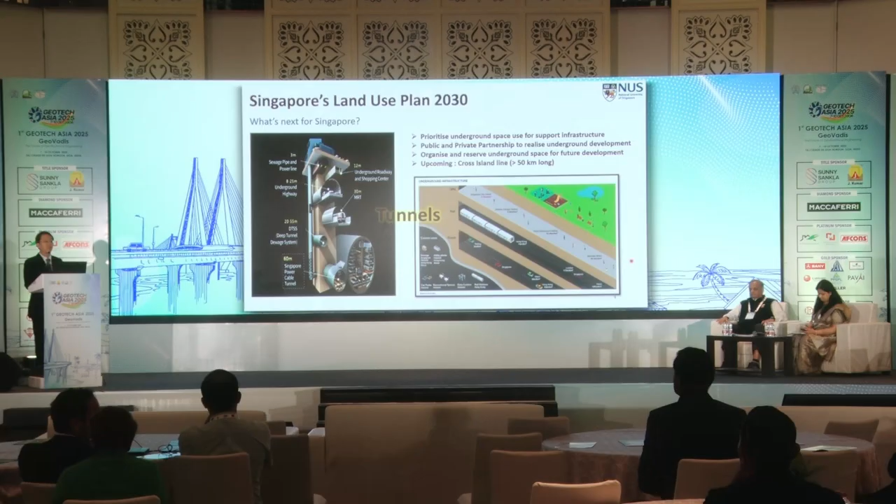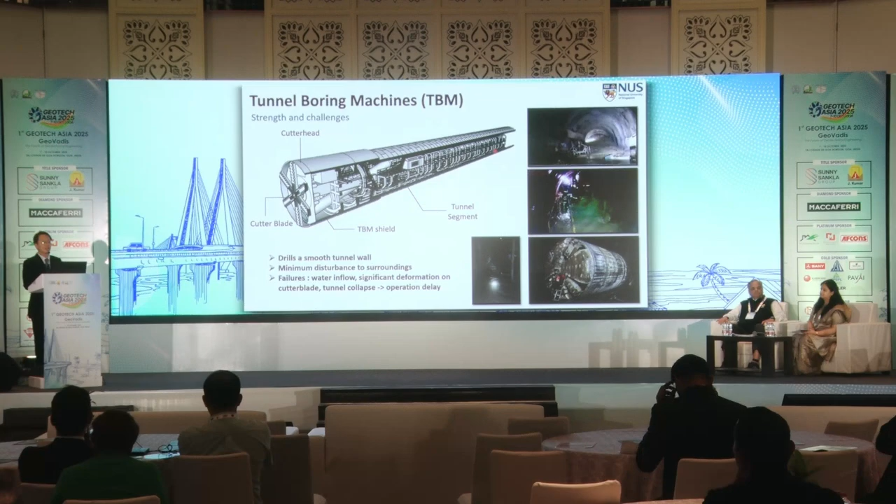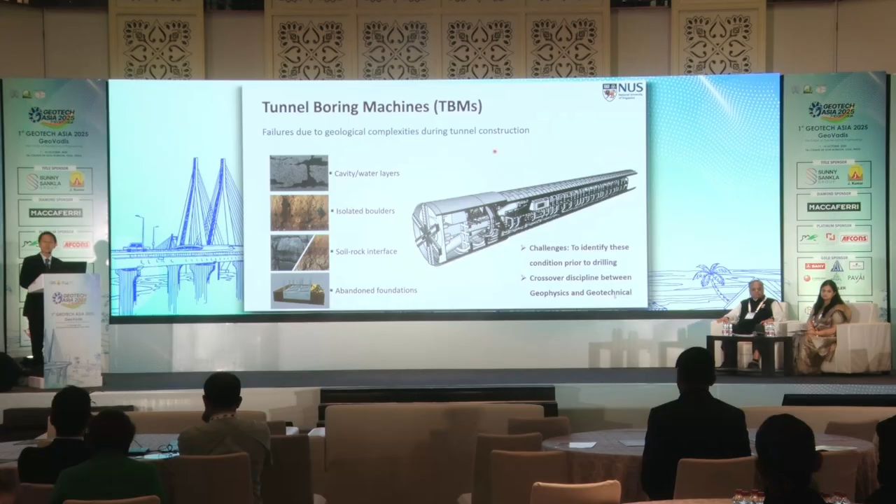Tunneling is often compared to digging in the dark. We usually don't know what lies ahead until the TBM reaches that particular location. And this uncertainty is made worse by the natural variability of the ground conditions. We may face challenges like water ingress, boulders, soil rock interfaces, or even unexpected encounters with old abandoned structures.

The tunnel look-ahead technology that I'll be sharing today is based on seismic reflection methods. It works a bit like bats, navigating in the dark. They send out sound waves which bounce off objects and return as echoes, helping them sense their surrounding.

Similarly, we emit seismic waves from the tunnel face, and these waves reflect off underground features like voids, boulders, or changes in geology. And these are all being picked up by our sensors, our geophones. And this gives us an early warning of the potential hazards before the TBM even reaches them.

So let us just wait for a while. Great. Fingers crossed. Okay, so with that in mind, let's move on to the research methodology.

Earlier, I mentioned how bats use sound waves to navigate. Similarly, in tunneling, we introduce seismic waves using either active or passive methods. Active methods involve generating waves manually, such as striking the tunnel lining with a hammer. Passive waves, on the other hand, are generated and rely on ambient vibrations, like the noise produced by the cutter head during the tunneling, as the wave source itself. Each of these approaches has its own advantages depending on the site conditions and operational constraints.

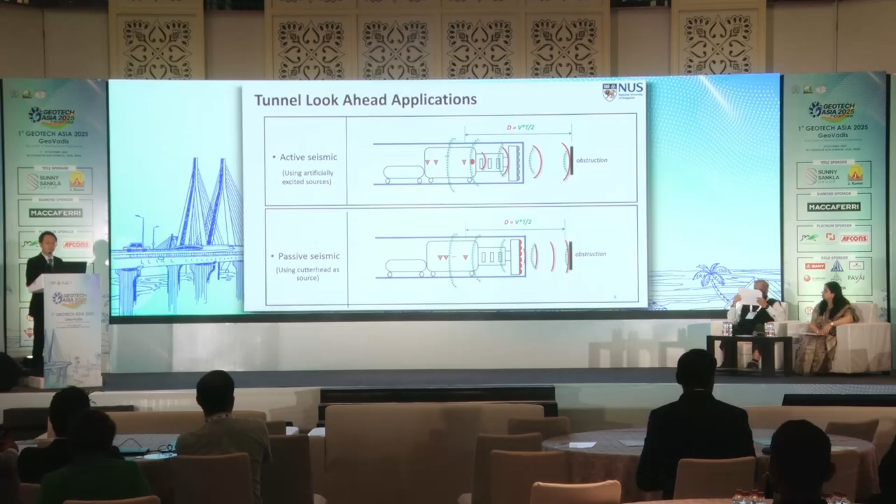This technology, we call it the smart boring system. So anything new, we just put the word smart in front. It combines the data collections inside the tunnel, the numerical simulations, and the wave signal processing to detect the size, the location, and the stiffness of potential obstacles up to about 30-40 meters ahead of the cutter head. And the key benefits include fewer exploratory boreholes needed, early planning and actions on potential obstruction risks, and improved safety for workers and equipment through better foresight and preparedness.

For the data acquisitions, we place geophones in a straight line along the tunnel wall. Just try and use the laser pointer. Can you see the laser?

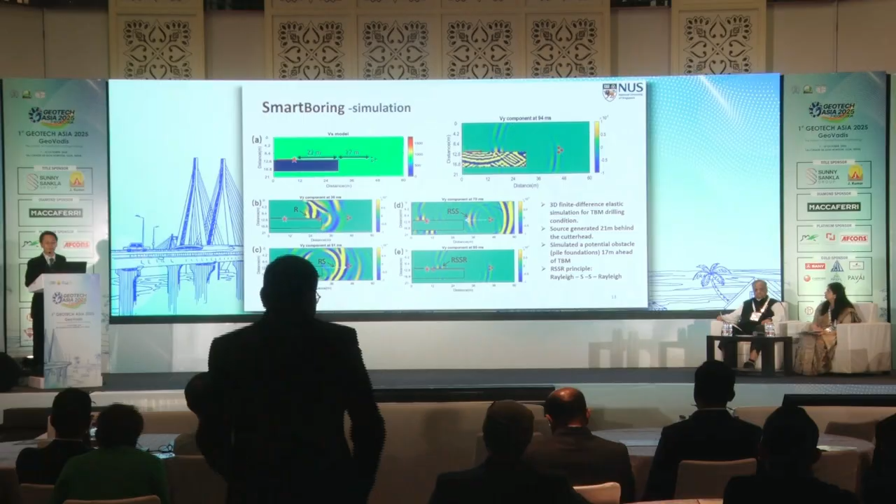Now let me explain how we use semblance calculation to isolate signals coming from ahead of the TBM. Since the geophones are placed and arranged in a line with known spacing, seismic signals in front of the TBM reach them one after another.

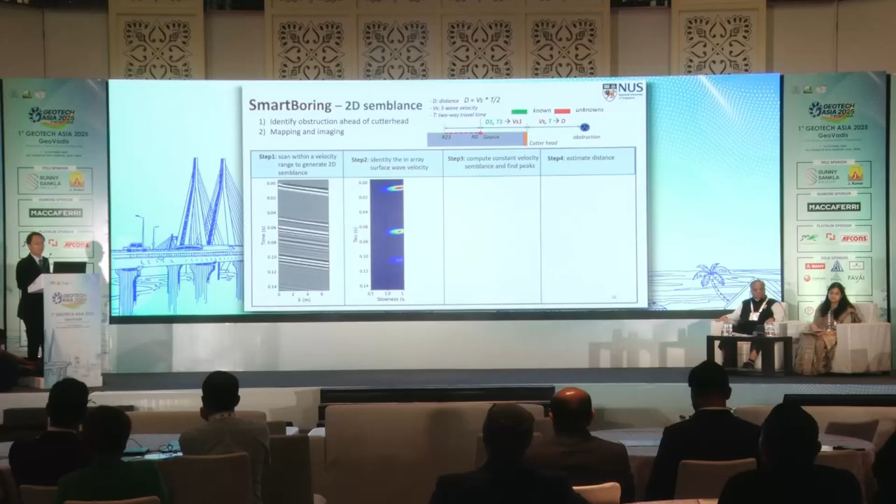The slowness is the inverse of velocity, that's all, nothing new. These different colors indicate the strength of the seismic signal. Once we are able to identify the prominent peaks in this plot, we can determine the velocity of the propagating waves.

Using this velocity along with the measured travel time, we can accurately infer the distance of the obstacle away from the cutter head, how far it is.

The next important aspect I would like to discuss is that the obstruction is not necessarily always right in front of the TBM. It may be positioned at an angle relative to the tunnel axis, which we call the aperture. To understand this effect, we conducted several simulations with obstacles placed at different angles, ranging from negative 20 degrees to positive 20 degrees.

As you can see from the animations of the three dots flying across.

So in the graph on the right hand side, the distance we obtained from our signals, the distance between the cutter head to our geophone, is 20.96 meters, which matches closely with the actual distance of 21 meters, as you can see from the left hand side.

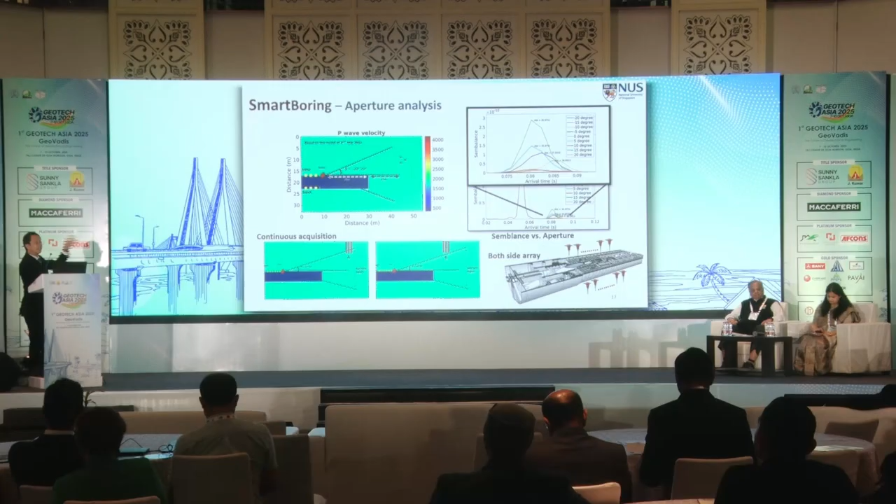For an obstruction located 15 meters ahead of the cutter head, or 36 meters total from the geophone array, we observe that the semblance signal is strongest at 0 degrees, the highest peak at the top right hand side. 0 degrees means the obstruction is right in front of the TBM. This signal decreases in strength and clarity as the aperture angle increases in either direction, meaning the accuracy of distance estimations becomes less certain with a greater aperture angle.

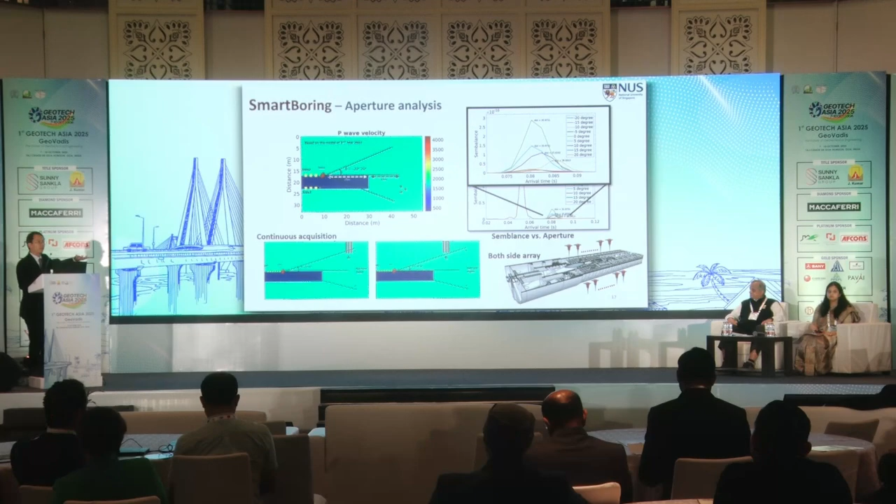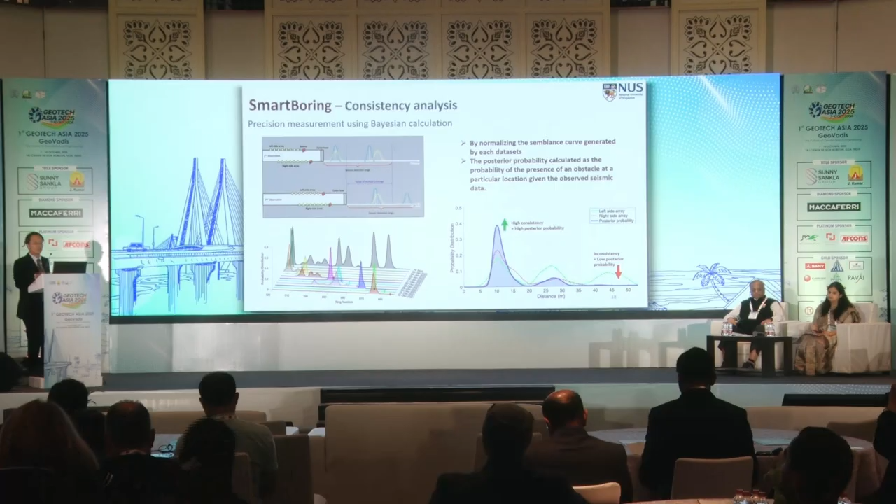So in order to improve accuracy, we recommend continuous data acquisitions as the TBM advances, allowing for confirmation and refinement of obstruction locations over time. Another effective approach is to install dual geophone arrays on both sides of the tunnel, as seen on the top left hand side. This dual array setup offers additional perspective to enhance data quality, and we can apply Bayesian calculations to further refine our estimates. By combining multiple measurements at different times through superpositioning, the resulting probability distribution peak, as seen at the bottom right hand side, indicates a more precise and reliable estimate of the obstacle's position, increasing our confidence in the estimated distance.

So now let us move on to review several case studies that demonstrate the application and effectiveness of these smart boring systems in real tunneling projects in Singapore.

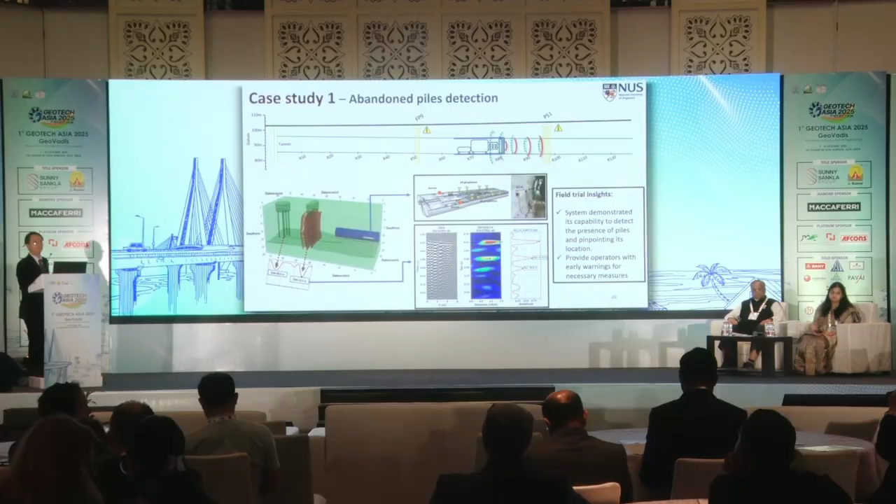In the first case study, we focus on detecting abandoned piles about 40 meters away ahead of the TBM. With continuous monitoring, we tracked the obstacle as it got closer to our tunnel face over time. This helped us identify two groups of disused piles, one previously unknown to both the Land Transport Authority, the client, and the contractor. This shows how the smart boring system can help uncover hidden substructure hazards that previously we would never have been able to perform.

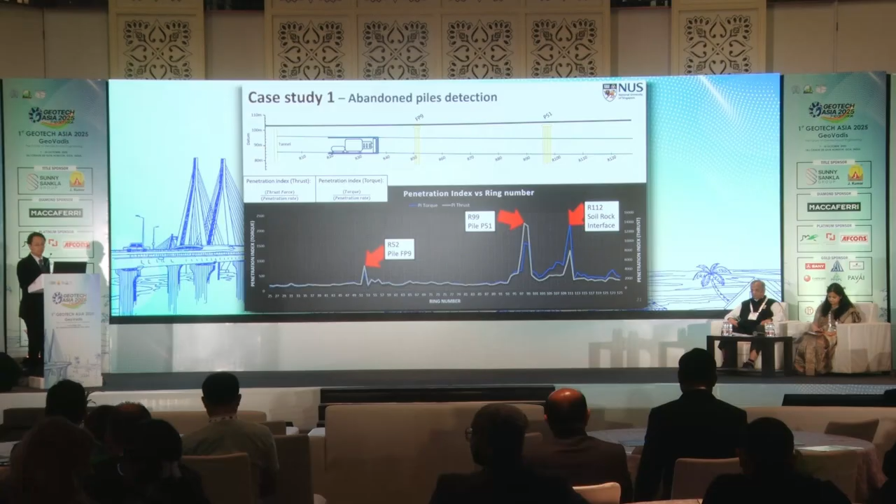Beyond pile applications, the system is also able to identify a soil rock interface at ring number 112, as seen at the bottom right hand side, showing its ability to detect different types of subsurface features. This brings us to our case study number 2.

Traditional site investigation has been helpful and provides ground profiles. However, they only provide that at those specific locations of the boreholes we conduct, but the soil strata and rock depths can vary significantly between our boreholes. In this case, we successfully detected the soil rock interface at around ring number 60, right here, and this was later confirmed by analysis of the muck density derived from excavations and the TBM penetration indices, as you can see from the green arrows here.

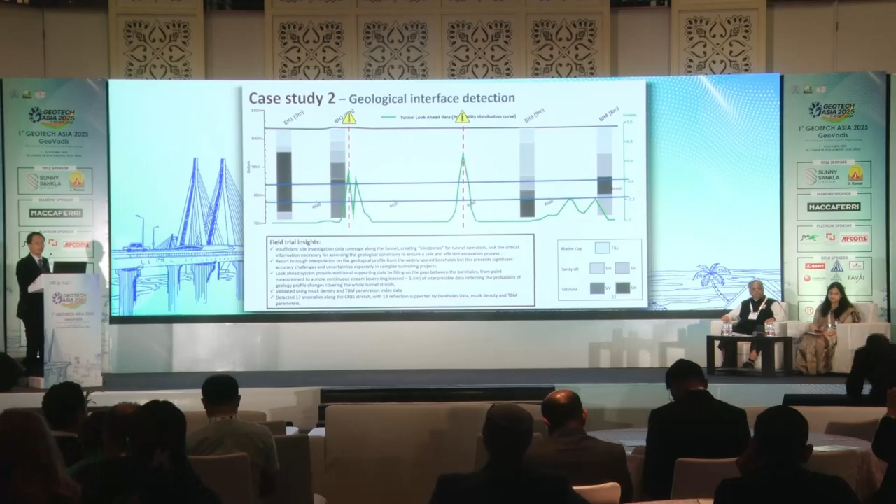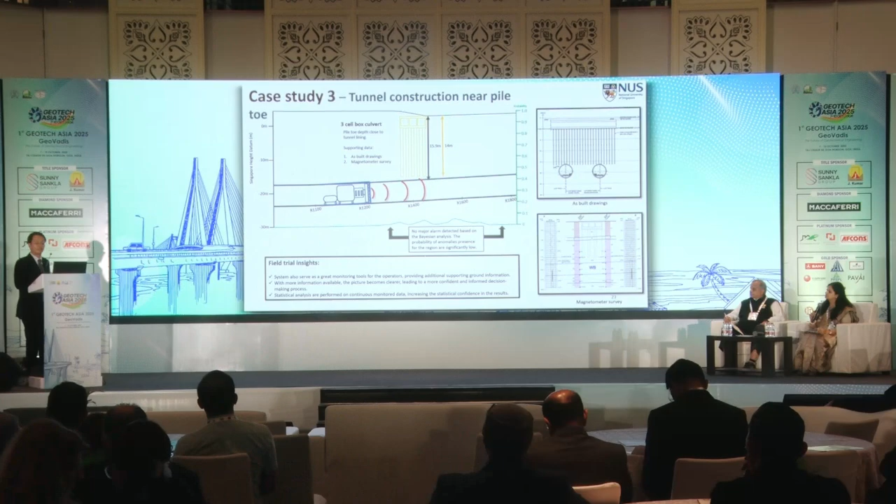Our final case study covers tunneling beneath the pile foundations of a 3-cell box culvert at Changi Airport. Based on as-built drawings and the magnetometer survey, the piles reached a depth of 14 meters, while our tunnel crown was at 15.9 meters, leaving a tight clearance of just about 1.9 meters. Using our smart boring system, we ran a Bayesian analysis that showed a low probability of any obstructions along the TBM path. Thanks to this, the tunneling went ahead confidently and smoothly without any issues.

Okay, so in summary, our smart boring technology provides a non-intrusive and cost-effective geophysical solution for geotechnical applications such as in tunneling.

This technique causes zero interruptions to our TBM operations. The TBM operations can continue to run as per usual. There is no cutter head access required, no drilling, no probing. It is able to offer near real-time reporting.

It has a long detection range of 40 meters, high detection resolution of 2 meters. We get precision measurements on our detections, and it is, most importantly, TBM independent.

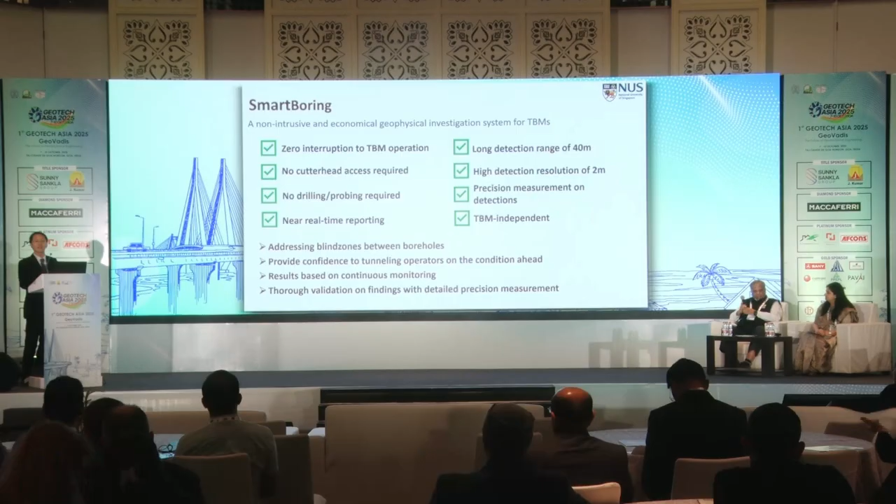Ultimately, the smart boring helps to reduce project delays, minimize equipment damage, and lower overall costs, thereby making tunneling safer and more efficient in a highly urbanized environment.

So I would like to express our sincere gratitude to our partners from NUS, from the government agencies, and the contractors. Thank you so much for your attention. I'm happy to take any questions that you may have.

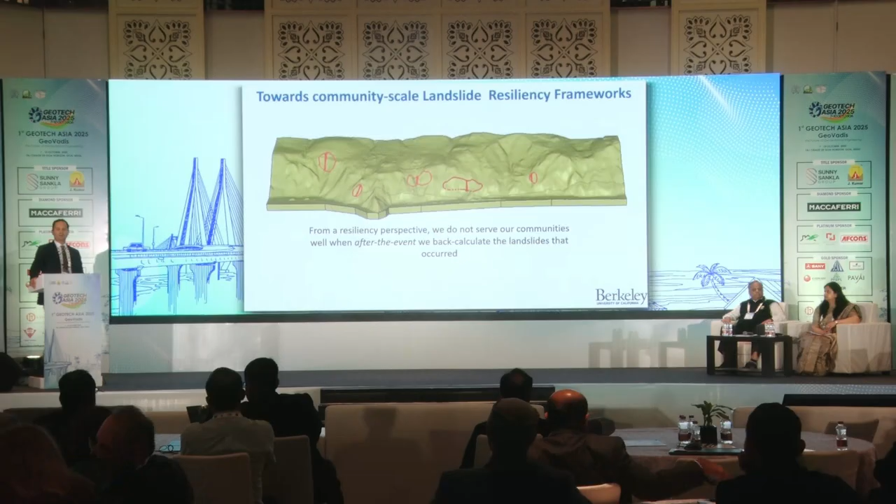When we're talking about the resiliency of our communities broadly, but also specifically for landslides, I don't think we serve our communities well when we only go back after the fact to the location where the landslide happened, drill our boreholes, do our cross-sections, run our models, and explain why the factor of safety was one or the other.

What we really want to achieve from a resiliency perspective is to be able to predict landsliding before it happens, over large areas. That has to be our goal. When I'm talking about predicting landsliding over large areas, ideally we'll be able to predict the exact location, the probability of occurrence since there will be uncertainty, the size of the landslide, and of course the consequences. Because whether it's a big or small landslide, where it is exactly matters. That's our goal.

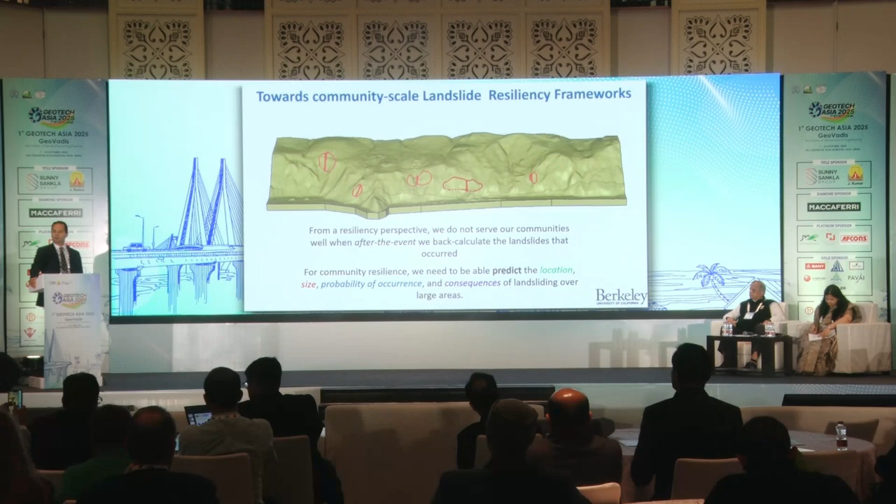Some people may think that goal is unrealistic. I believe strongly that with the advances we have in technologies and modeling, we will be able to achieve this, not in the too distant future. This is a framework you may have seen, a classic framework we use for what we call the landslide life cycle. It starts with mapping, being able to map the landslides and monitor the geologic environment, then trying to take lessons out of these landslides by doing some calculation.

Then of course, understanding that once a landslide triggers, it may move a lot, so we talk about run-out analysis. If we understand all of this with the system, we should be able to do predictive modeling throughout our regional system and identify the weakest spots and fix those first, fix the ones that have the worst consequences. And then we go back with monitoring, really do it.

So I'll try to show some applications of this type of life cycle that we have here for one study area. Now we have applied this to a number of areas - Nepal, New Zealand, California, as well as Greece. I'll focus on Greece because I'm from there, and I have a number of examples staying on one side.

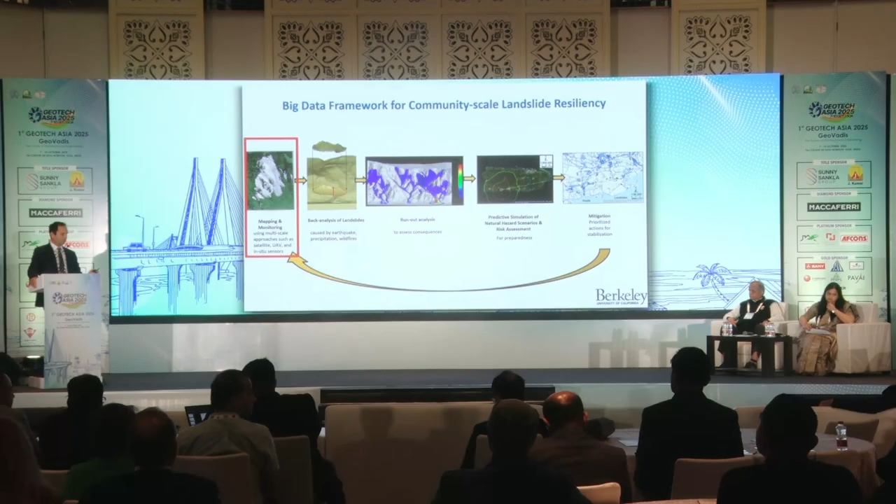So I'll start with mapping a little bit. To describe what happened here, I'm going to be using Lefkada Island in Greece. It's located on the western side of Greece, maybe you can see it with the bullet. And it's one of the most seismically active regions in Europe. There is a devastating earthquake every about 18 years, going back to the 15th century.

That area is really primarily covered by limestone formations, and it's a very actively sheared subduction zone. There's actually a transform fault in that area. The limestone is very heavily sheared, so what you have is steep slopes, sometimes as vertical as 90 degrees. But when you look at the rock itself, you can see it's very sheared, brecciated sometimes, but it stands there.

But of course, when the earthquake happens, there's going to be damage. In 2015, there was a magnitude 6.5 earthquake, and this is footage from a video collected by fishermen during the earthquake. What you see is basically what looks like a battlefield - the entire coastline, which is relatively steep and high slopes, has come down. This is November, so there are no consequences really, there were not that many people at that time.

But this is also a very popular area. These beaches down at the bottom of these slopes are very popular in the summer, and this would have been tremendously consequential if this had happened in the summer. So there was significant landslide along the west coastline, and I'll focus on that in the next presentation.

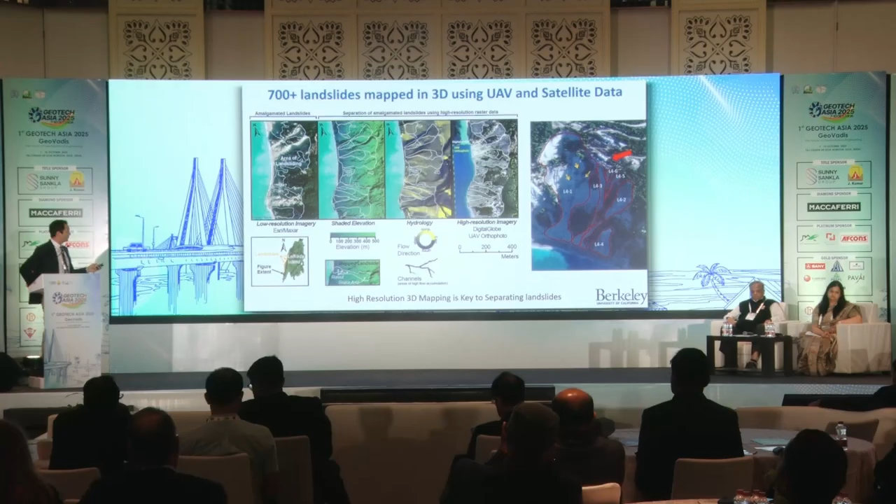Now, if I have a 3D model after the earthquake and a 3D model before the earthquake, and we were lucky to have that because of the work of the Greek government, you can take a difference between the two 3D models over the entire coastline and create 3D geometries of all the landslides that happened along the coast. What you see here on top is satellite imagery using the SETSM approach, and the bottom is the UAV imagery. What you see is colors: the blue colors represent a loss of elevation, meaning that if I take the difference of the digital elevation model after and before the earthquake, I have a lost elevation, things move downward and slip.

What you see with red colors is where material accumulates, where the debris goes. For every single landslide you see here, we can see how much material failed and where it went. We do this so we can separate, for each landslide, what we call the source of the landslide and the runout of the landslide. This is super important from a consequences perspective, we can look at how much sediment is generated, what type of material is generated, where it's going, how it's washing out, how it's eroded.

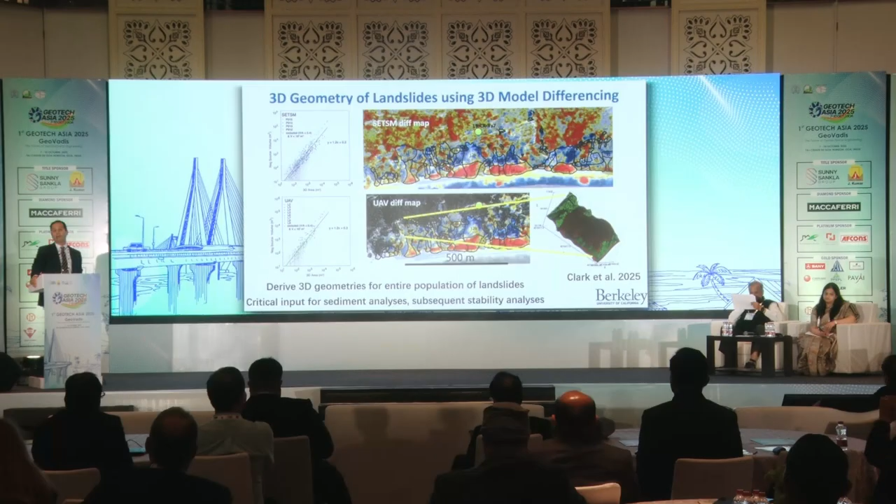What I want to emphasize, in case this 2D image doesn't communicate it, is that for every single one of these landslides we have a full 3D geometry of the source material and how it translated downward in this type of environment. We can use that to back-analyze, in full 3D, every single one of these landslides.

So I would like to do that now. The goal here is not to analyze just some of them, but all of them, and try to see the trends. There's a number of ways we've done it in geotechnical engineering: 1D, 2D, which is what's commonly done in geotechnical practice, and of course full 3D.

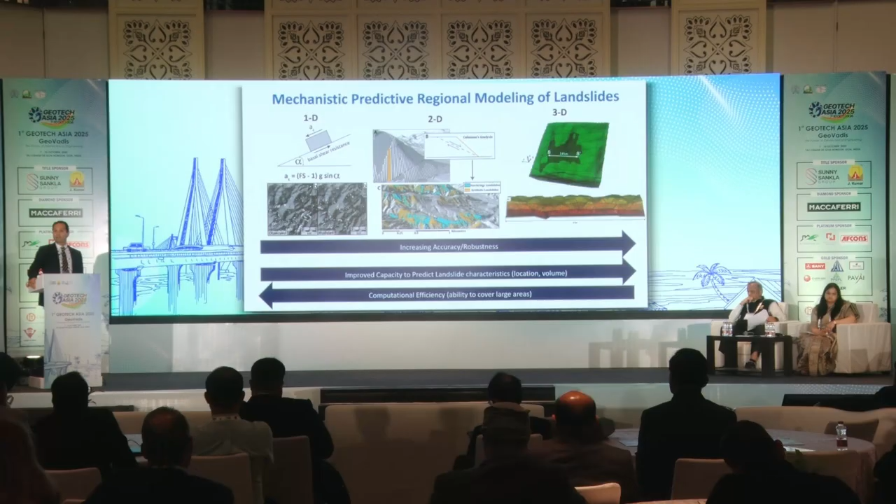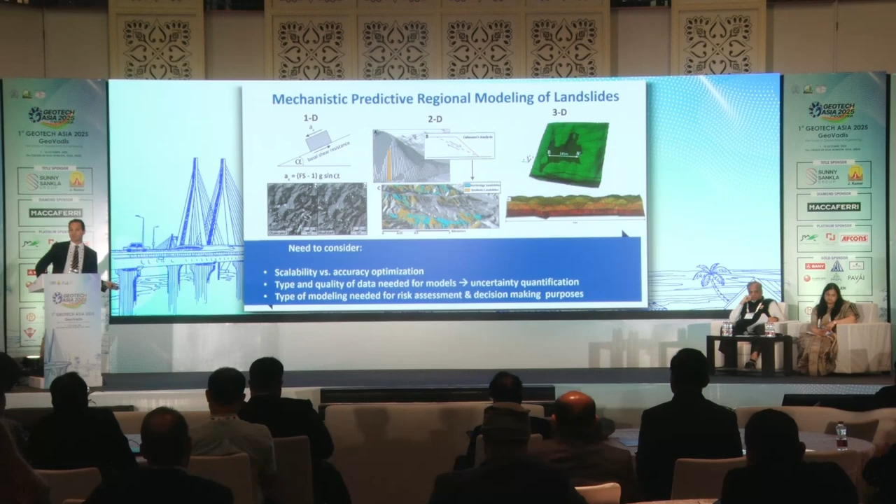There are advantages to each of them. As you move toward 3D analysis, you get better mechanism, better math, more robust understanding of how things move, but the computational cost is higher. So there's an advantage to doing it in 3D, but many times even a 1D or 2D model may be adequate. We've been working on scalability of computation versus accuracy, and the quality of data you have, you don't want to apply a 3D model to low resolution data. The data you collect has to be consistent with your model.

For the purpose of this presentation, I'd like to show you a pseudo-3D approach that we developed. We developed a script for these calculations, we call it RISTAB, and we've made it available to the public so anybody can use it for free. Basically, the RISTAB approach is really a 1D model, very simple, for seismic triggering purposes.

But once you trigger, we use geomorphic characteristics to form an entire scoop of a landslide from that trigger cell throughout the whole uphill area, basically creating a 3D landslide. We've checked that model against full 3D analysis, and I won't bother you with details, but we have papers describing that comparison. The reason this is useful, at least in my view, is because it's scalable.

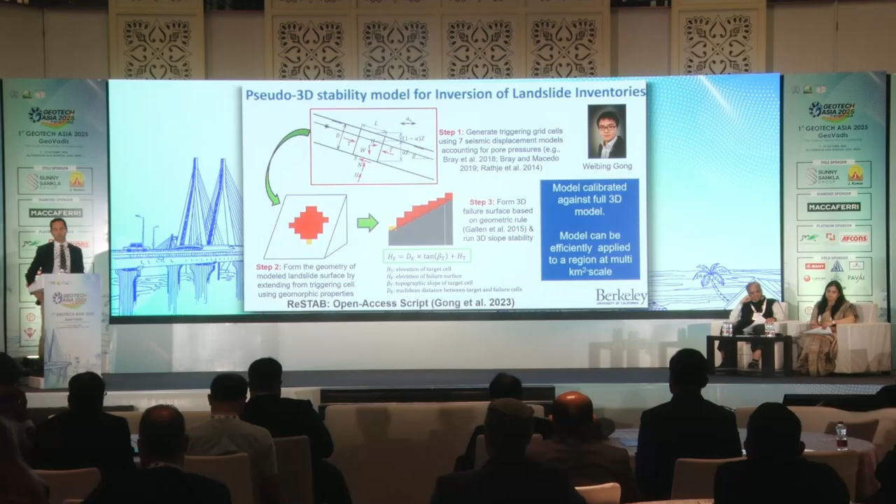I can apply this, and we have applied it over tens of square kilometers, so I can actually make decision making. A full 3D analysis over 10 square kilometers would definitely need supercomputers to do that right now.

So what we do with this technique is take every single one of the mapped landslides that I showed you before, and try to see what type of triggering depth and strength of material will match the location, the volume, and the area of each of these landslides. Out of each of these models, we get a best match geometry, as well as an average normal stress and shear stress for the entire landslide.

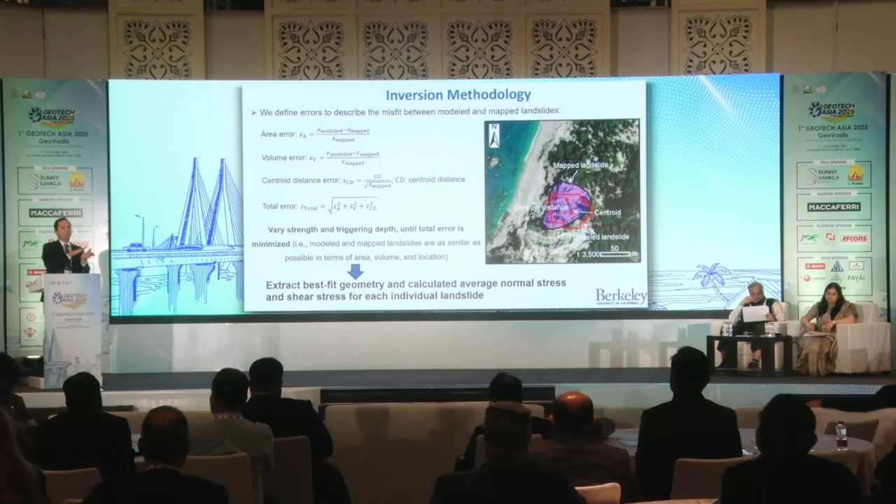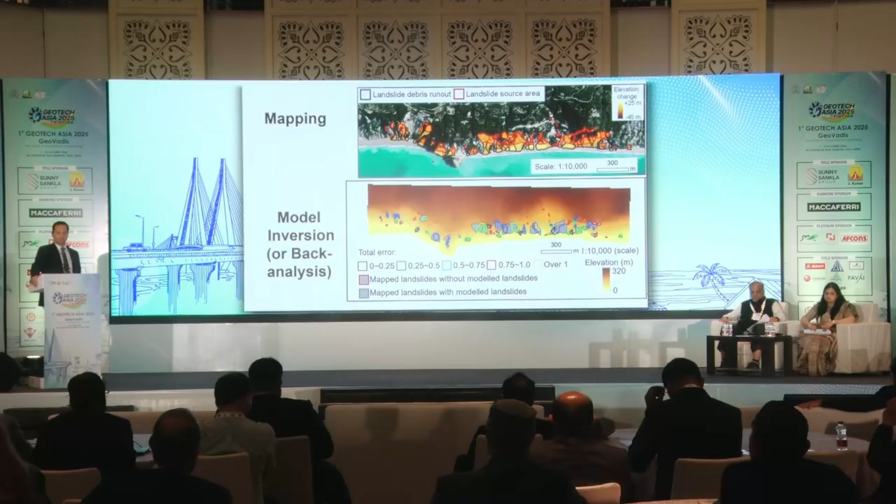So then we match our model. It's not going to do a great job, but we can see how great a job it does. For each of those landslides, we match the model results and try to do as good a match as we can, and we measure the error, how well we did.

Just the major conclusions here in the interest of time: we can see that there are more landslides and weaker strengths in different formations. That we know because geology matters. So you see different strength, lower strength in the Ionian limestone versus the Paxos limestone, which is local.

That we know. What is more interesting in my mind is that within the same geological unit, we'll see also differences in strength. We find zones within the same geologic unit that are lower strength and have more landslides. And that's great to know.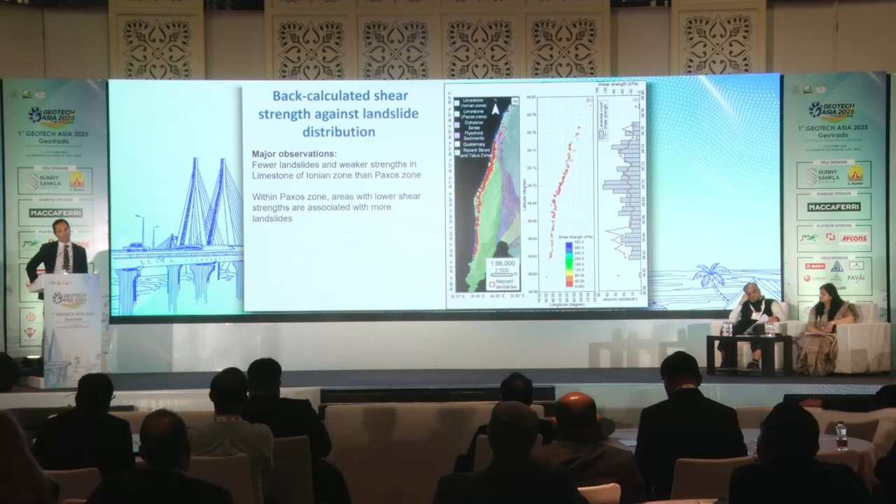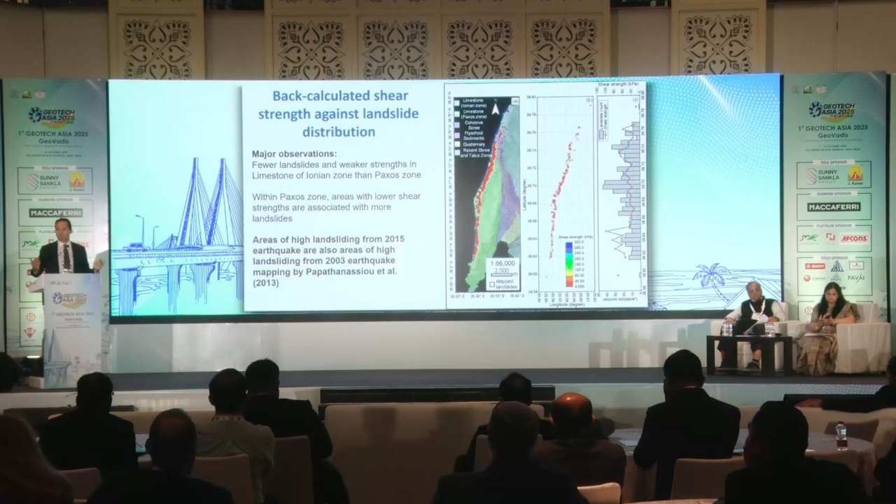What was fascinating to me is that because there was a landslide that had happened in that area from a different earthquake in 2003, the same areas that failed more catastrophically in that earthquake had also failed, and I'm talking about high accuracy now, had also failed in the previous earthquake. So there is a pattern, and nature behaves based on physics, and if you collect the data to pay attention to that, we're able to see it.

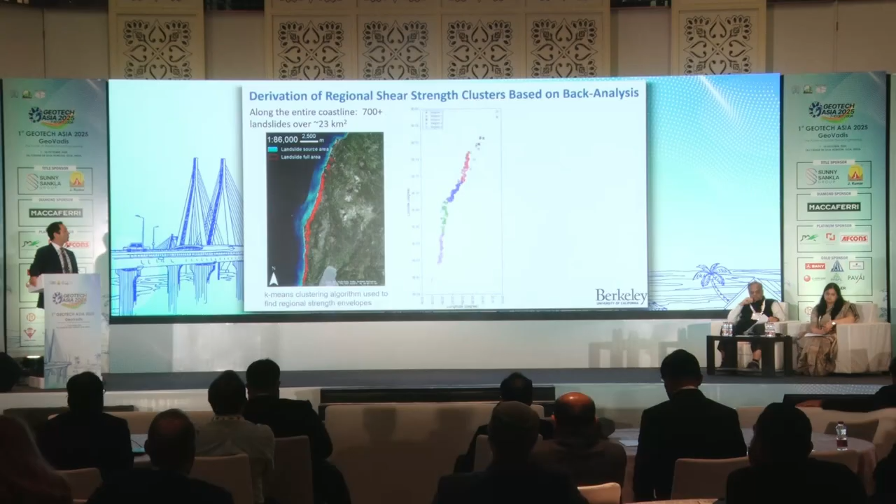So once we have this information, going back again to each landslide having a point, we can start looking at regional strength estimates that are based on these landslides. And so what we're able to see is different areas that really have the same strength.

So what you see in the figure here for the green cluster is points, and every point that you see there is one landslide. We have made no assumption of cohesion and friction. We have used no laboratory tests to derive it. Although I have to say for our study we did also collect field lab data for this.

But what you see in the figure on the right is more of a Coulomb strength envelope, a yield for that cluster, for that area within the same geologic unit. While another one will have a different strength, and we're able to see that region. And that I think is very, very strong, and very exciting.

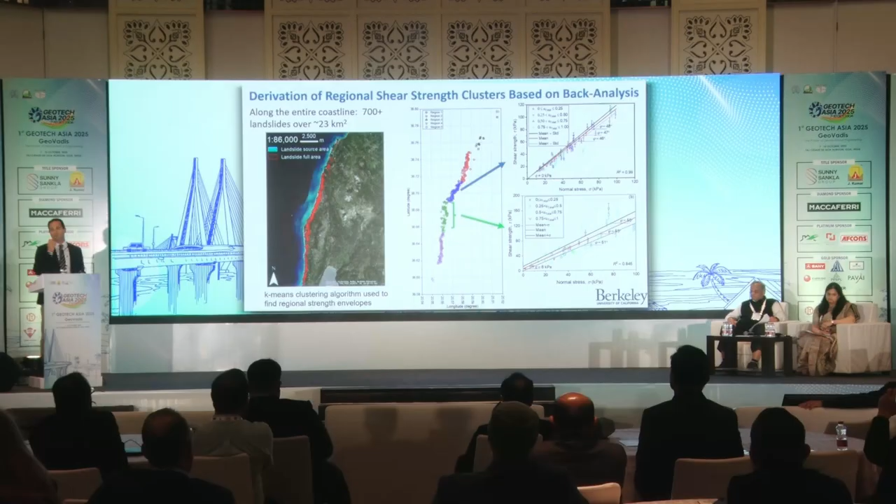Now moving on, once we have a landslide that has been triggered, that landslide is going to move downhill. That is important from a risk perspective because some communities are not threatened by failing themselves, but actually from something that's coming from above. And I know I have my Nepalese colleagues here, and I know they know that very, very well. So it is really important to understand how far the landslides will move.

And once we have mapping of the source and the runout, we're able to calculate the full 3D trajectory on average, as well as the distribution, of each of those landslides.

The problem with these approaches is that they're very empirical. So how do I use this lesson? Okay, it worked for this event. How about the next one? How about a different area?

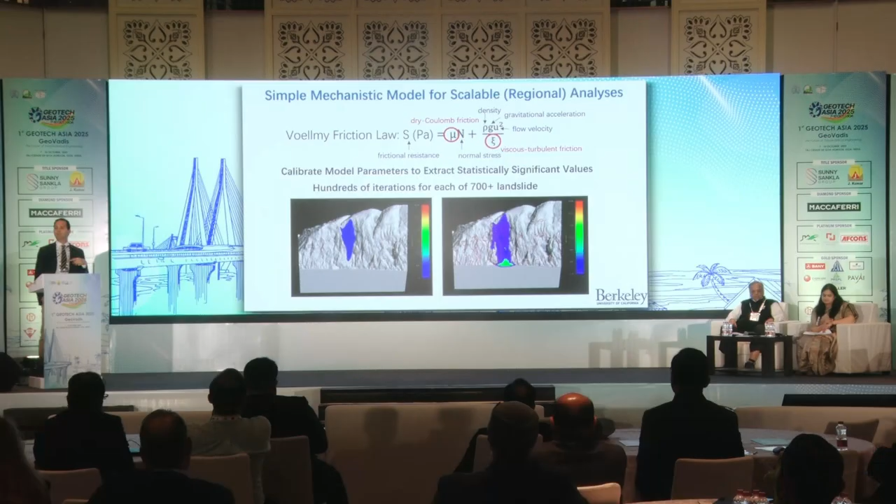So what we did is for each of those landslides, we do inversions until we find the parameters that match that landslide to the observation. You can imagine doing that for the entire coastline. Here is just a simulation showing this. On the left is basically what has been mapped with a model of the polygons, and the gray is what is modeled. I'm not showing you the good matches here, just random matches, these random simulations.

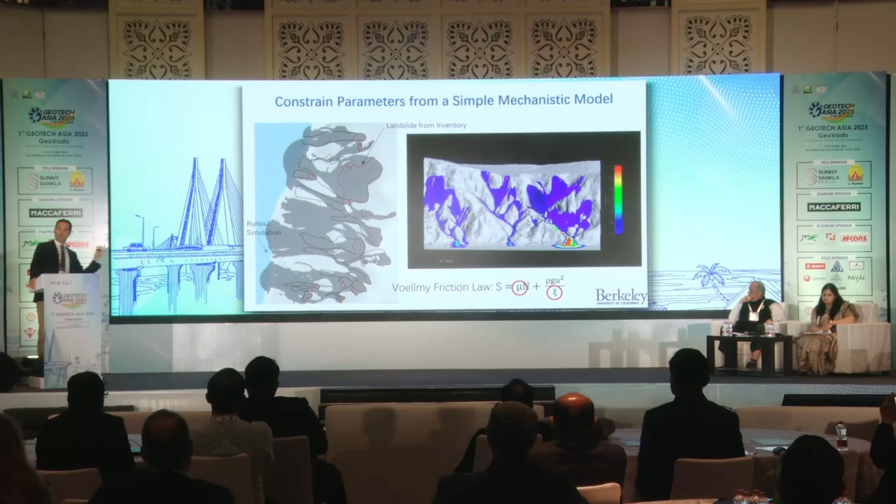At the end we do inversions until the model matches the map, and so we're able to extract parameters, the Voellmy friction parameters, for each of those landslides, and look at the regional difference. In general, we find this model works very well, especially for large landslides. We're able to estimate the dry Coulomb friction and the viscous turbulent friction necessary to match this runout.

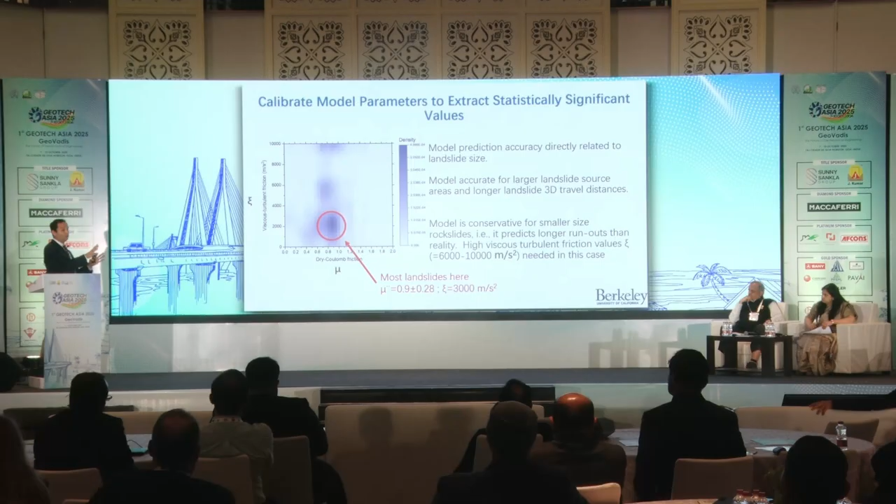For the very smaller landslides, we're seeing that this model is actually very conservative. It's biased, it's not matching the data very well, it's actually flowing too much, even for high friction. But you can use these insights for future simulations, and also when it comes to precipitation-induced landslides, as things get wet and these parameters change, you can track them. That's something else to work on.

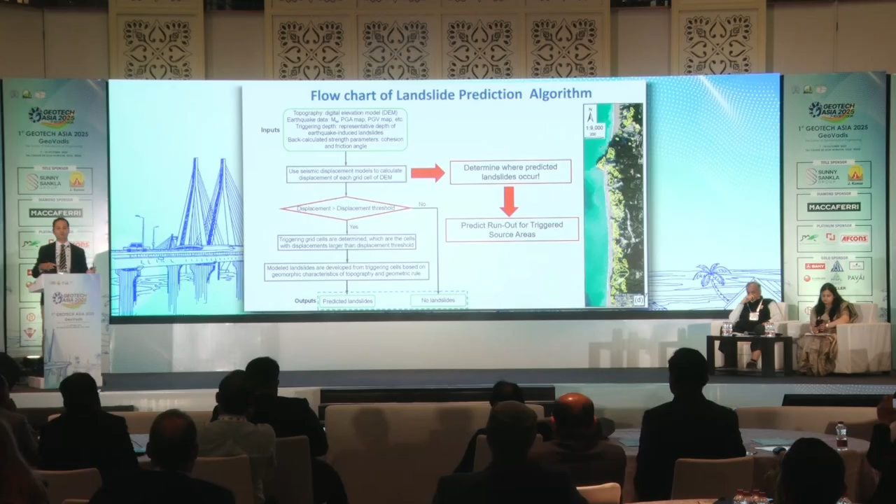In conclusion, I want to make sure I communicate what I think is very important to achieve community resiliency: we have to be thinking of the system first. We have to start big and apply models like that. And of course, there is always going to be room for more sophisticated models in the high priority areas that we have identified in an objective manner.

Advances in monitoring technology, specifically satellite and UAV data, but we have also integrated geophysical data and other data, do allow us to have a very detailed documentation of what's happening from an earthquake, and I showed you the example of the Lefkada earthquake. This monitoring data can work very well with numerical models that are also developed to operate at the system level, and I showed you a couple of examples of that for landslide triggering and landslide runout.

I think once you start building your confidence in models like that, you can actually more reliably predict and really be prepared for future earthquakes or even precipitation events, although my focus has been here.

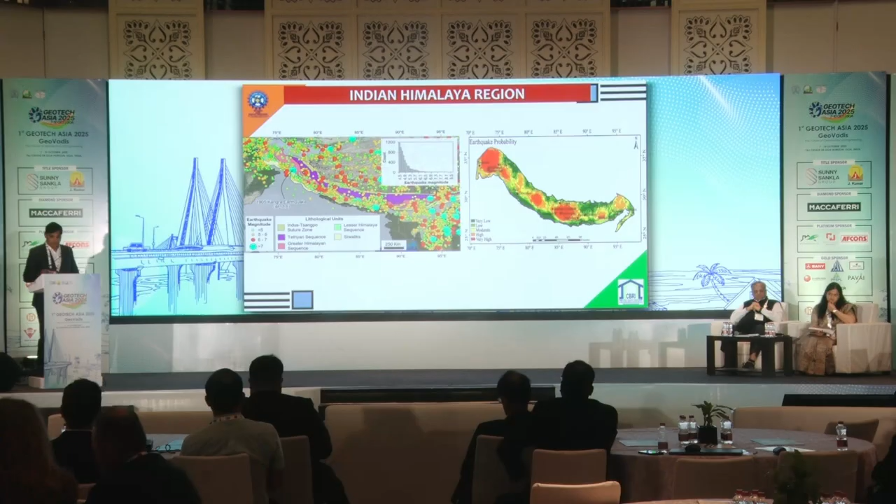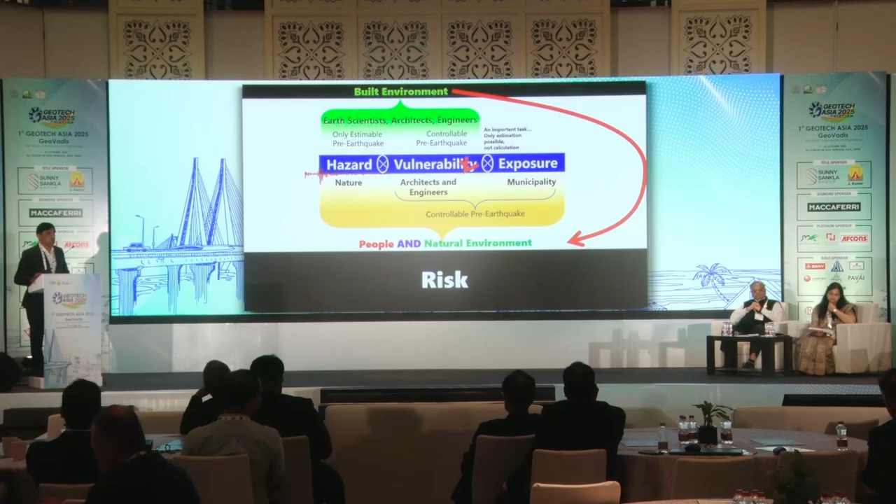Now, when you talk about risk, it is nothing but a product of hazard, vulnerability and exposure. We cannot predict or exactly calculate the hazard, but as an engineer we need to focus on vulnerability and exposure. The basic objective is to protect people, habitat and infrastructure — life safety and reducing economic losses is the prime focus. Vulnerability is my first objective, because whenever you see different disasters happening all around the globe, or particularly in IHR, they are causing a lot of loss of life, property damages and business losses.

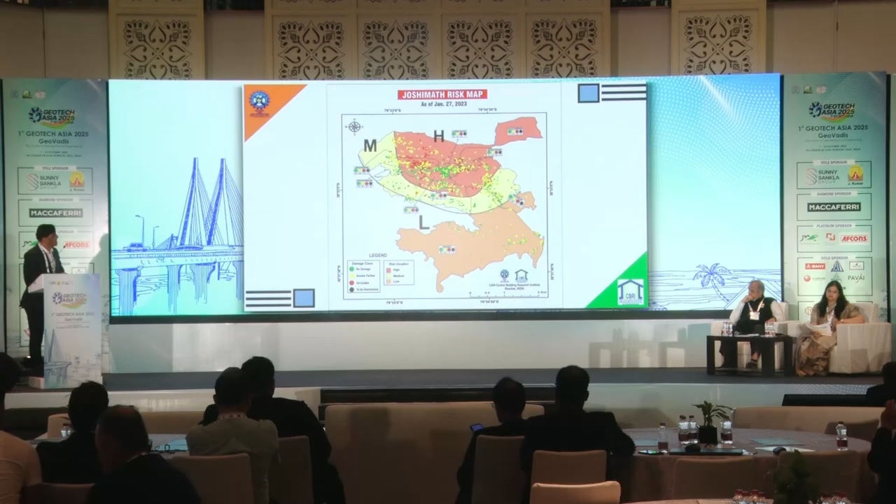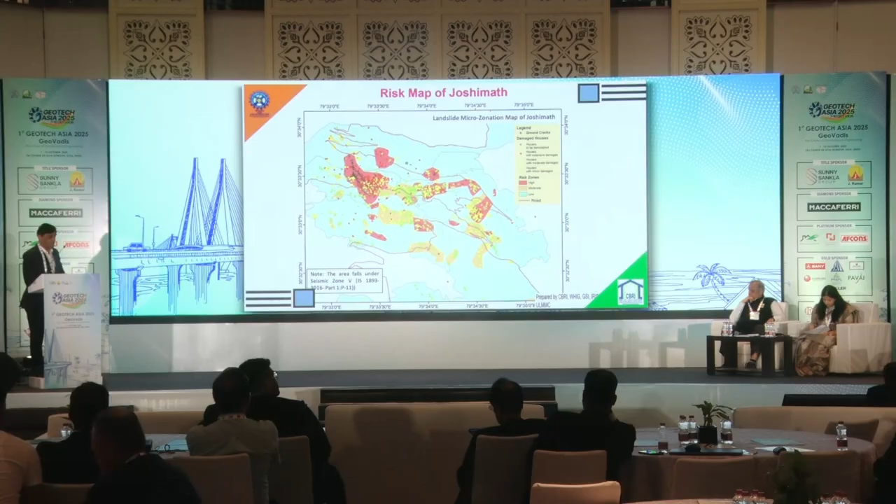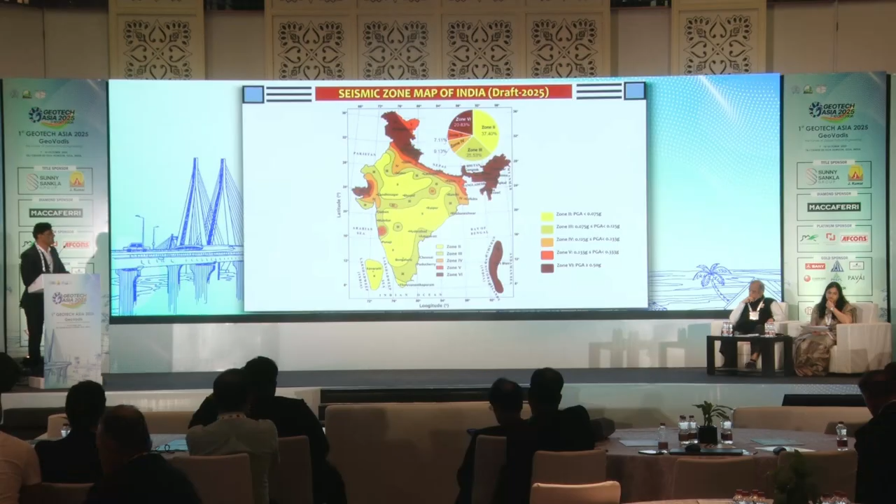So moving from landslide down to earthquake, India is now revising its seismic zoning map. This is the draft seismic zoning map, which clearly shows the entire IHR region is in seismic zone 5 and 6, with the PGA value with the return period of 2475 years as 0.5 G.

And when you talk about earthquakes, we have witnessed several occasions and we have a great understanding. But now we need to translate this understanding into reality on ground. Having known the different kinds of disasters that happen on the foundation, masonry buildings,

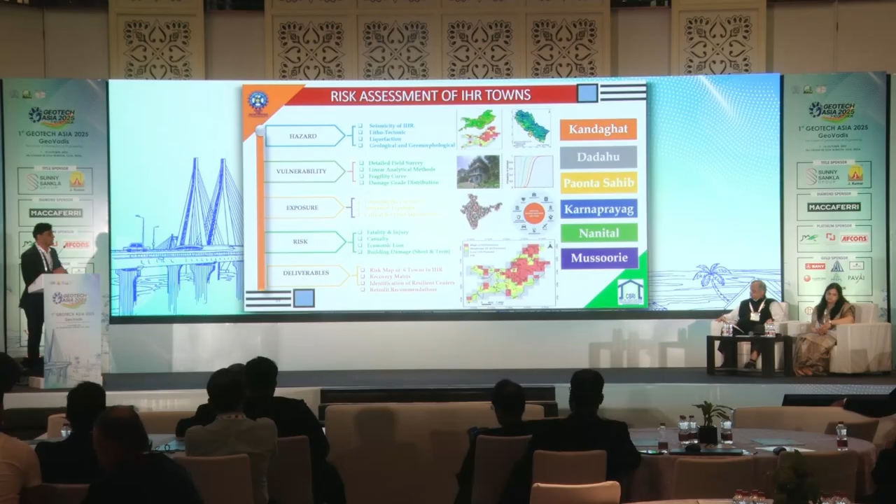For that purpose, we have carried out detailed hazard assessment, vulnerability, exposure, and thereby assessed the risk in terms of fatalities, injuries, casualties, economic losses, and building damages, and developed a risk zonation map for the town.

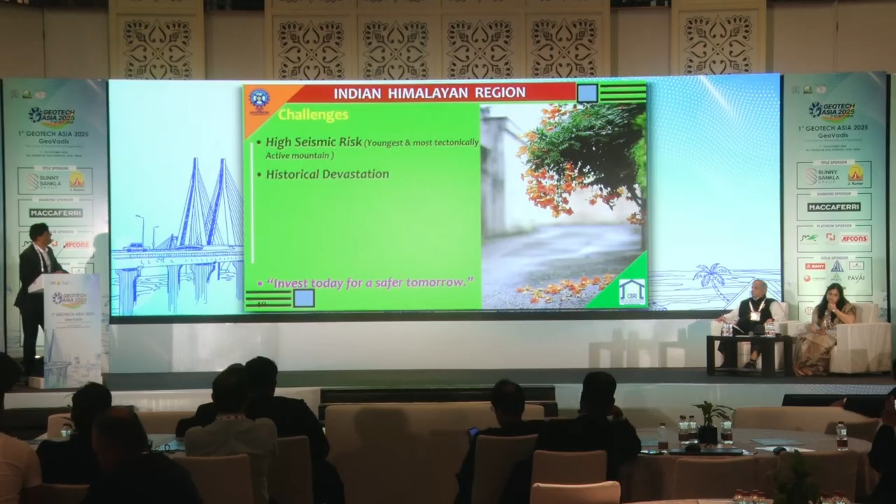So whenever we come to the Indian Himalayan region, the challenges associated, as we know, include high seismicity, historical devastation, vulnerable population, and anthropogenic pressures. In addition, when you talk about hazard, we know that the complex lithology, lineament faults, geomorphology analysis, and complex natural setups need to be understood properly.

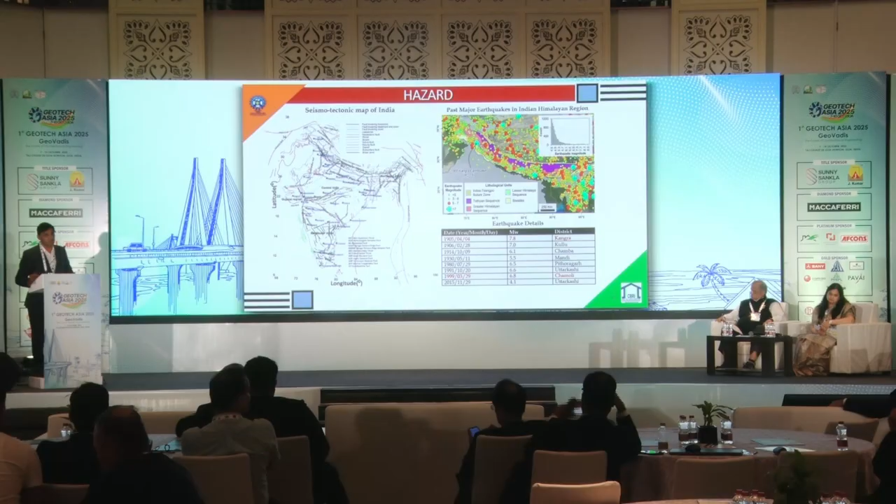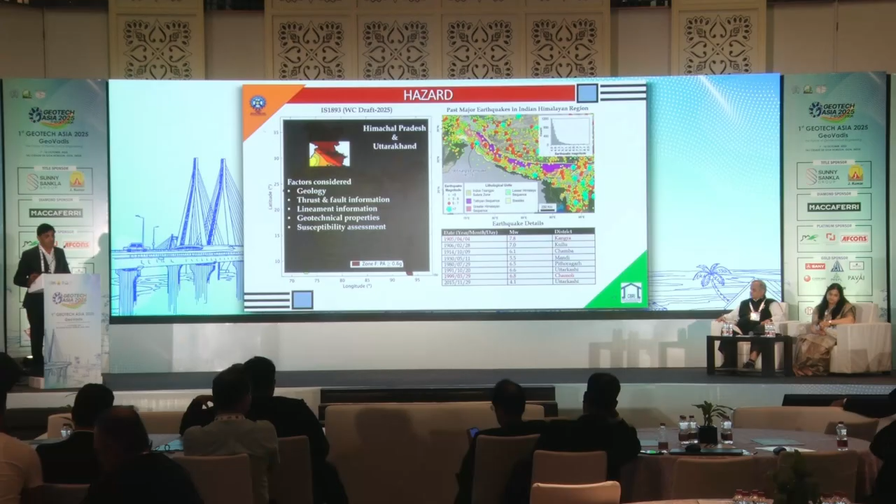Having studied all these aspects, we have correlated and studied in depth the seismotectonic map of India, past earthquakes, and the Indian standards which are about to come. All these aspects have been considered in terms of geology, thrust and fault information. Then this is the earthquake and liquefaction zonation map.

So this is as regards to hazard. In terms of vulnerability, we know that around 85% plus buildings are non-engineered, masonry buildings. Masonry being a heterogeneous material, poor performance in earthquakes is well known. In addition, it is adding fuel to fire, like steep slopes and poor siting is a highly considered phenomenon. All critical infrastructure like schools, hospitals and important buildings are located at vulnerable locations, and particularly in masonry, again it is an alarming scenario.

So that needs to be studied in terms of physical vulnerability, which basically attracts social and economic losses. For that purpose, we have developed a methodology which follows two approaches: detailed and fragility curve. In the detailed approach, we conducted a detailed road-to-road survey of buildings, developing economic loss-inducing parameters and factors in terms of penalties, where we considered siting as very important from a geological perspective, then foundation, architectural and other parameters, assigned them appropriate penalty, and validated it with reference to past earthquake records in the Indian context, thereby calculating the earthquake feature index.

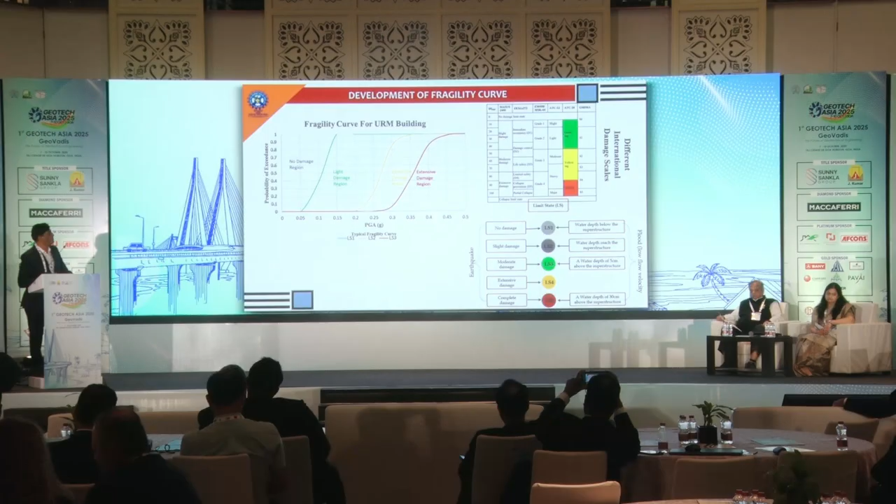Now, the next approach we have also followed is fragility curve development. The fragility curves were developed again for Indian typologies using 11 selected earthquake records.

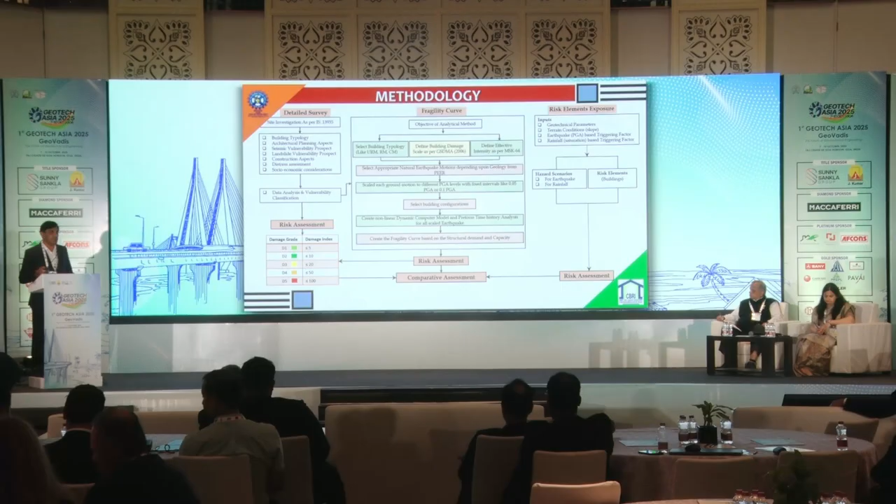These records were scaled up and the analysis was carried out at an increment of 0.05 G up to 0.7 G. By conducting non-linear dynamic analysis on different Indian typologies, we developed the fragility curve map for masonry buildings and similarly for RCC buildings. These curves have also been analyzed and validated for their correlation.

When we talk about exposure, that is the effect due to any kind of disaster on population and assets, which is very critical. The challenges in terms of exposure show the high risk population is significant because around 50 million people are staying there. There is a dense cluster of assets and infrastructure at a vulnerable stage, and around 25% of the population comprises a vulnerable population, less than 18 or 60 years plus.

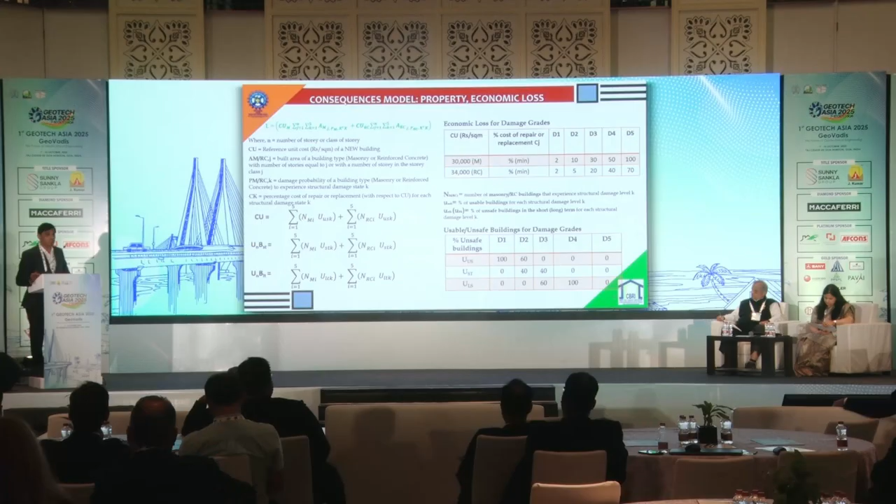Having completed collecting the data, we developed a model which assesses the risk in terms of fatalities, injuries, homeless, economic losses, and loss of buildings for short term and long term. For this purpose, we developed a damage probability matrix in terms of death and injury, and similarly for the loss of buildings for short term and long term.

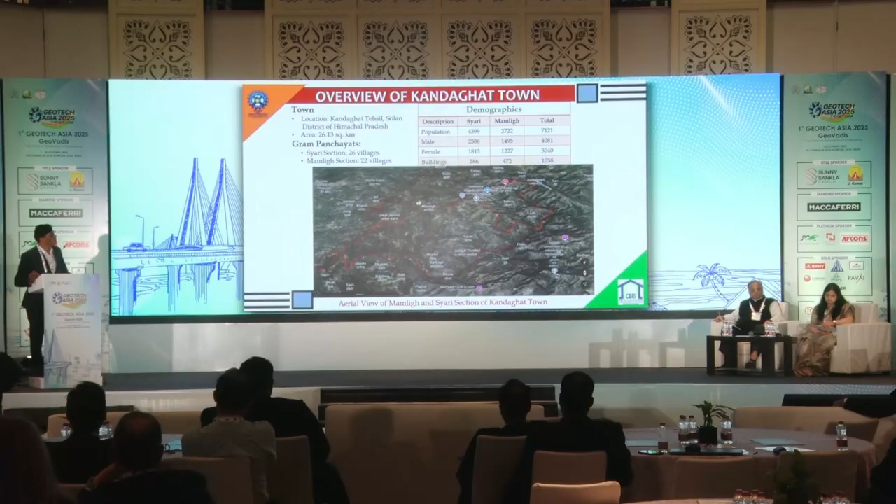This is one of the case studies I would like to present, for the Kandaghat town. This is Kandaghat town in Himachal Pradesh, located around 26 square kilometers, with this kind of demographic setup. For this purpose, we again conducted a detailed investigation for each town.

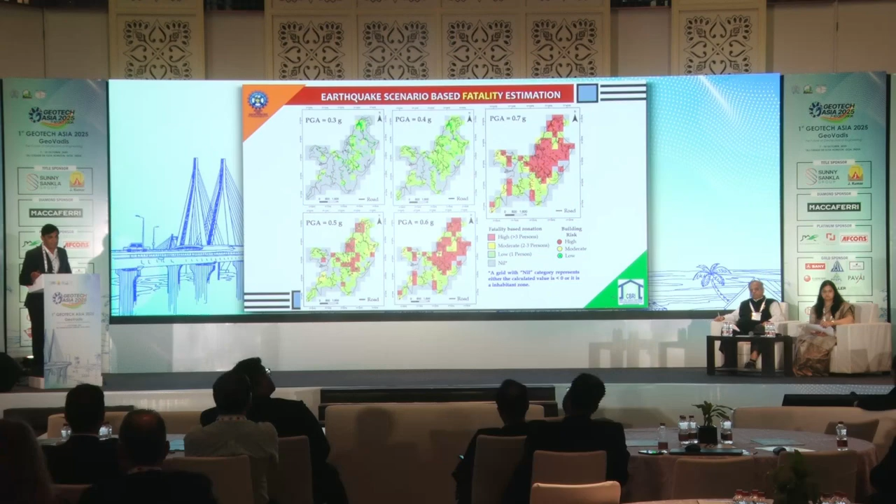Upon completing these facts and figures, we plotted this data on a map with a 200 by 200 meter grid in terms of fatalities, injuries, casualties, economic losses, and thereby the risk map for that particular town.

We have also highlighted the regions where we should establish resilient centers that should be accessible in the post-disaster event and should be robust so it can provide facilities to the occupants or people there.

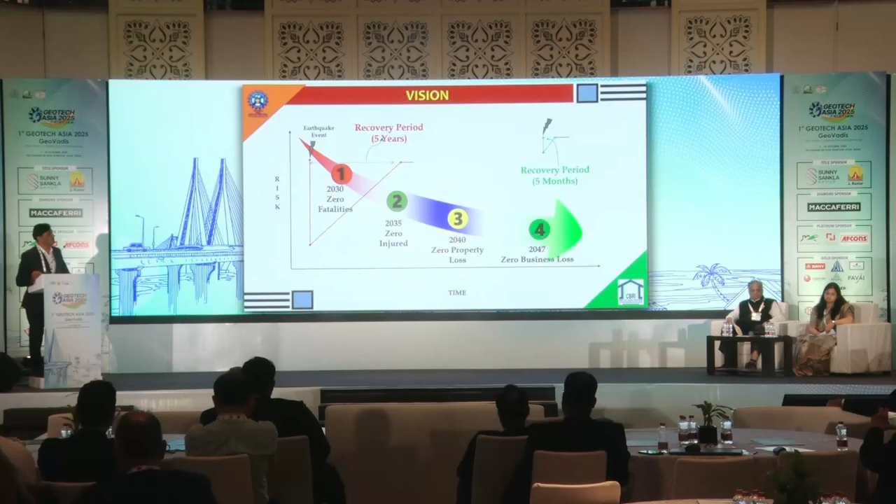This is how, if we adopt this approach, we can definitely reduce the risk. Our vision is that whatever losses in terms of life and property are happening today, we need to reduce it by 2047 to around zero tolerance.

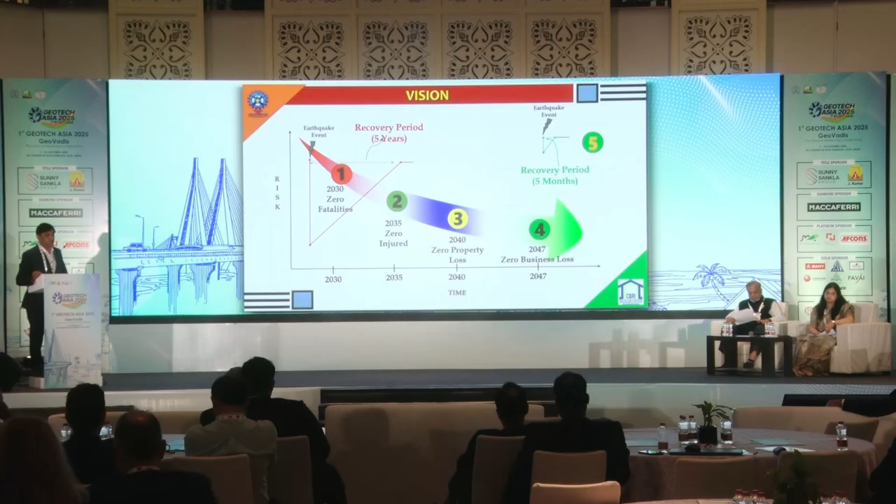For that purpose, nowadays whenever any disaster happens, recovery takes around 5 years. We need to reduce it to 5 months maximum.

For that purpose, the mission would be code compliance implementation at the stage, informed safe land use planning, institutional coordination, community awareness, disaster risk reduction mainstreaming, and importantly, fostering research, development and innovation.

Our submission is that whatever new construction happens has to take place using confined masonry, which is well tested. What will happen to existing buildings?

We need to retrofit such buildings on a massive scale, primarily by phasing these things out, first targeting important buildings using an innovative technique, the steel twin lintel band.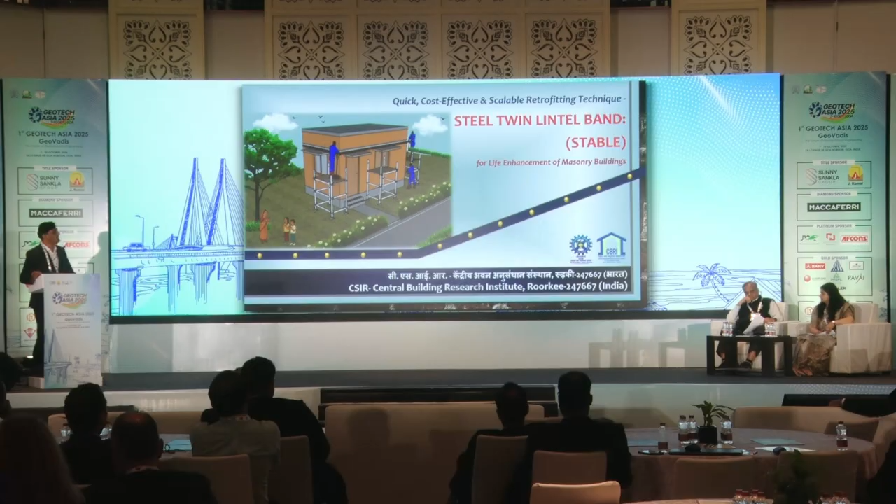In this technique, we simply have to provide the MS flat at the lintel level for low seismic zones, that is seismic zone 2 and 3.

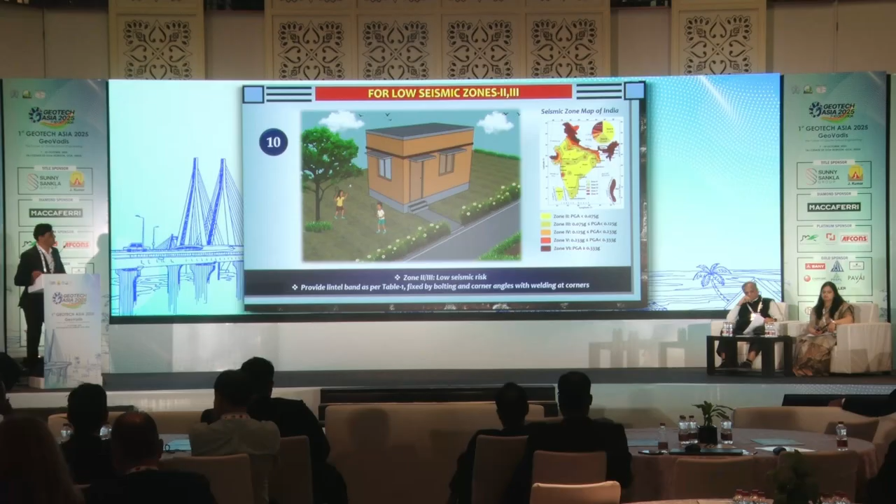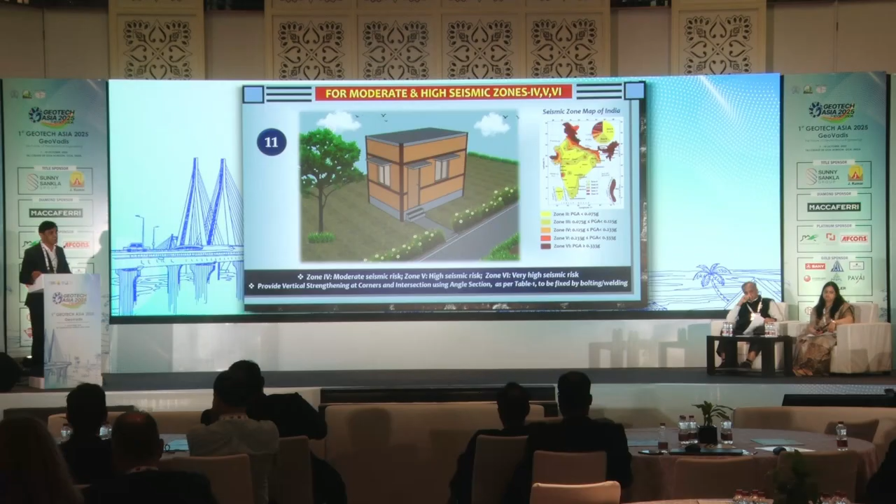In case of moderate to high seismic zones, we have to provide this MS flat band at lintel level, sill level, and at the corners in terms of an angle. The quantity, size and shape of this particular angle has also been evaluated experimentally as well as numerically, and that has been tabulated in this form.

This kind of approach will only lead to savings, but then the question comes: what will be the cost? The cost is also reasonably very low, around 3 to 5% of the reconstruction cost, which sounds good as against the 30% permissible limit provided world over for retrofitting.